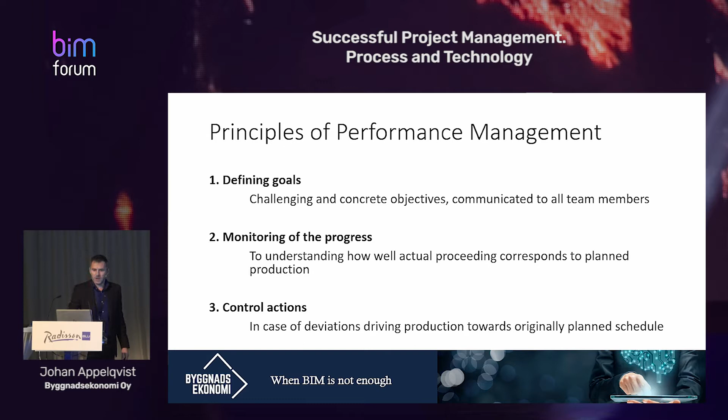And the third one is the control actions. When you have the goals and you track the proceeding and there is a deviation, what are the control actions that you do immediately that will bring back your project to the defined track heading for your goals?

So this means that the most important part of performance control is to ensure that you are proceeding as planned. Now, in order to do that, you need a high-quality plan as a basis that you can do the tracking on.

And then we go into BIM technology and the power of all the data that is available through BIM modeling. I'm going to show you shortly the process of BIM production management. Every tool I've run into so far follows almost or close to this process.

You start up with the actual modeling work, the design work where the design is created, and when you manage the process of how it is created, you end up with 3D models, you end up with BIM models. By setting requirements and managing the process, you end up with the model.

Now, when you have a model, you immediately have position and geometry. Every modeled object knows what kind of geometry it has. It has a physical position, as Kim and Jukka have shown. It has a position in the model, and it has a position also in the world.

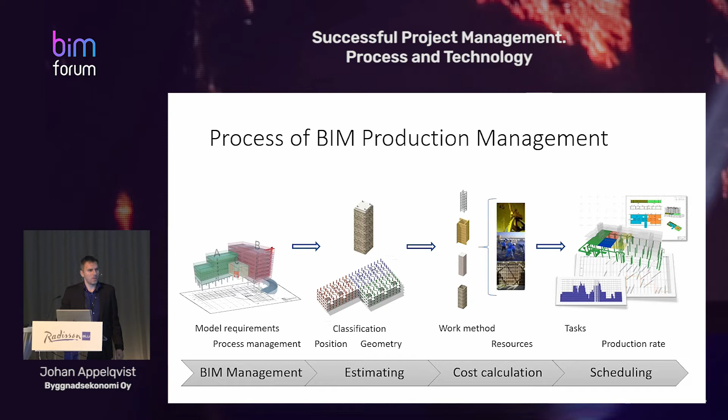Now, what do we actually need to do in order to succeed with that? There are two main things that has to be right. First of all, reliable geometry. We must trust the geometry. And in order to be able to trust the geometry, there are some things that we need to do.

We need to use the modeling tools correctly. Whether it is Revit, whether it is Tekla, or something else, we need to use the software the way it was intended to be used.

Well, the structural engineer thinks of a floor as the floor he's standing on, and the load-bearing structure below it. So we need to understand when we communicate with people that we communicate in the same way, on locations and on the geometry.

We need to agree on the modeling of connections, how do we handle it, what are the requirements for it. And we need to decide on the general level of detail, what are we supposed to find inside our model. I'll get to that a little bit later.

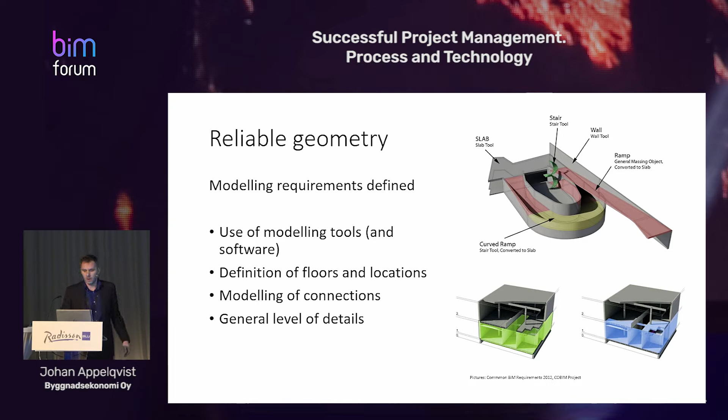When it comes to identification, actually finding information in the model, you need some kind of classification system. I learned yesterday there is no national standard for classification in construction in Lithuania. However, I'm not really concerned about that, because in Finland we have at least six of them. We have one for construction, one for MEP, one for electrical, one for infrastructure, one for structural engineering.

So which one should we use? It doesn't matter. You can pick any one, or any of them. You can use the Uniclass system, there are international alternatives. The most important thing is that there is a structure, and the structure is logical, it has full coverage, and it is used consistently throughout at least the one design area that you're working with. Because otherwise you will not be able to communicate with anyone else in your team, and they will not be able to find information in your model.

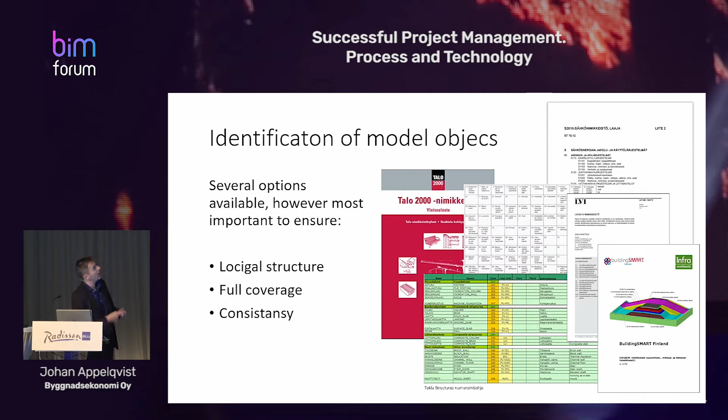But when you do have these two things in order - the geometry is there, it is reliable and right, and you have one identification system so you can actually find information, and it is built up so the full model follows the same structure - then you can pick any single object out of the model and read out of the geometry those quantities that you are interested in at that specific time.

The picture here wants to simulate that you can get the net surface area of a wall, the gross surface area of the wall, the length of the wall, the height of the wall, the width of the wall, the volume of the wall, as long as you can trust that the geometry is right and the identification tells you that this is wall type 1, you will be there.

Then you can bring the information into databases. And in the databases, you use recipes to bring those geometry quantities into material, work, and need for supply. Each of them can then be added with cost information, unit costs, how much it costs to build it, or with time information, how many hours it takes to build it.

I'm going to talk a little bit more about scheduling, but on the cost part, I know there are other people talking about cost later on.

Combining cost visually to objects is really, really effective. On the Stockholm Arena, a 240 million euro project in central Stockholm, built by Peab, we had estimators on site. My colleague worked for several years as an on-site estimator, providing cost data on, let's call it, a daily basis.

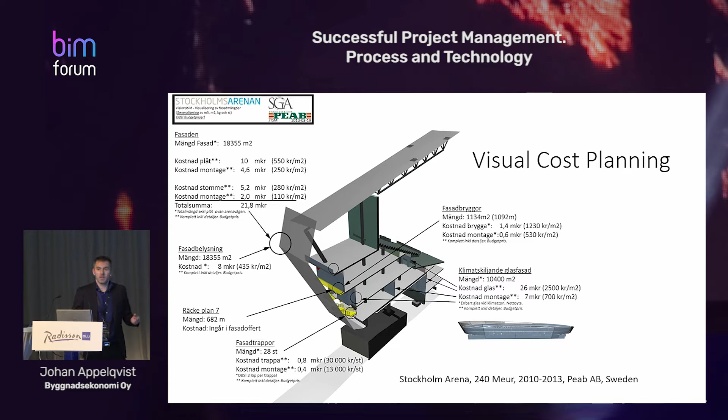So you can make your money visual. When you do it, you get everybody involved, everybody understands what you're talking about, and you get much more value compared to comparing just Excel spreadsheets.

Let's go into scheduling and optimization and try to figure out why 90% of every project is delayed, or why it shouldn't be delayed.

Scheduling methods. I mainly work with 3 scheduling methods. The first one is Gantt. These are the lines that are similar in every single industry. It shows activity as a function of time. It shows a line: when activity starts, it shows when activity stops.

The absolute best thing about this scheduling methodology is that it is an international standard. Everybody can read it. You don't need to be a construction expert in order to read it. And honestly, in early stage of the project, you are mainly discussing with people that are not construction experts. They might be economic experts. It's easy to read, it shows the activity, it shows the time where you're going, and you can see at a specific time what activities are supposed to be ongoing.

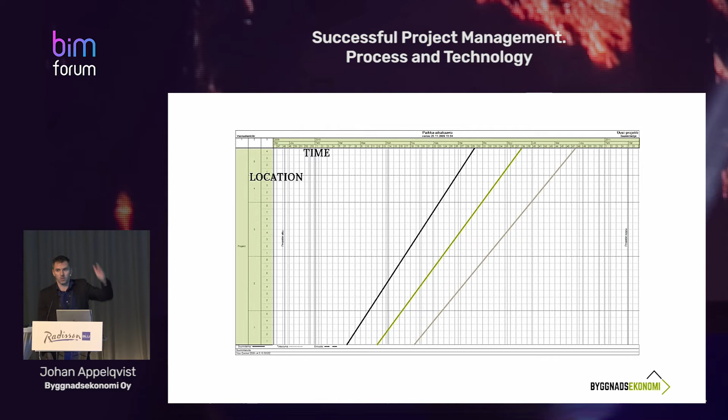Then you have the time, telling what day, month, week, or hour the work is being done. The actual activities are drawn as lines that go across this chart. You can see the starting point of the lines. Reading from above, you see what week it starts, what week it ends, and reading at any specific time you can see what activities are supposed to be ongoing.

You can also see where the crew is supposed to be. At this specific time, the black activity is supposed to be in the 3rd section's 6th work area. The green one is in the 2nd section, 6th area, and the last one, the gray one, is in the 1st section, 3rd work area.

You can read 3 other things from this. First, you can see where the crew is going next, so you see that when you're done with section 2, you move on to section 3 — the work order. Second, you can see what is inside one location, the activities that are going to happen there. If you look at one location vertically, you see first the black one, then the green one, then the gray one.

For example, first you build the walls, then you paint them, and after that you do the flooring - 3 activities coming after each other. The 3rd one shows us the area between activities. So the closer they are together, the more risk in the schedule, the further away they are, the more you can deviate from your plan without affecting other activities.

As a planning method, it brings you an overview, so it compresses the schedule. When it compresses the schedule, it means that you can show location at the same time as time. So when in Gantt you need to show 10 activities, the movement from 10 different locations, it is 1 activity in the line of balance.

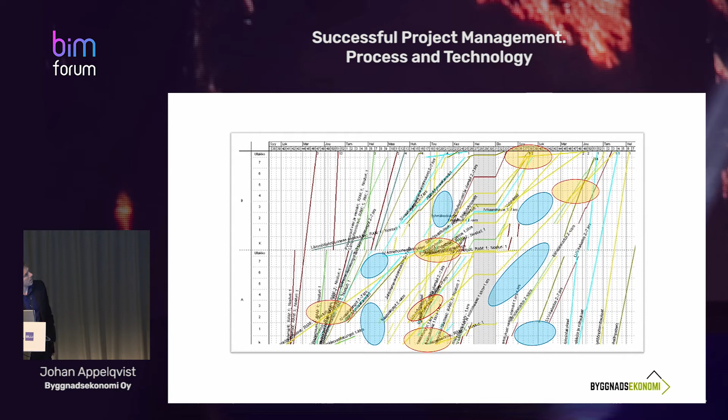And still, you see here, we have all these white spots. Now, what are the white spots? These are physical areas where no activity is going on for several days or weeks, because everybody wants to work at the same location at the same time a little bit earlier.

So if we go back to this one - it's not easy to plan like that. Projects don't look like that. You don't do all activities in every location. But what if you could?

Wouldn't it be nice if you could schedule so that every activity on the site would take 50 days? Every activity, always 50 days. It is possible. I mean, you're the manager of the project. You can decide that you use 1 person or 10 people. 1 person is slow, 10 people is fast.

So by deciding the crew, how many people are working, you can also decide on what they are working on. So are they doing just the carpet, or are they doing the carpet as well as the lining? Carpet and lining is slower, just the carpet is faster. You're the head of procurement, you can decide what you want. So you can actually affect what is the length of the activity.

Now, if every activity takes 50 days, which is smart, and you have a housing complex with this staircase, A, B, C, D, then on the first day of the project you open the door in the last floor of A and say, here you go, Mr. Contractor, go in, do your work, see you in 50 days. And 50 days later, he comes out from section D, last door, and says, here I am. Every 5 days you let someone in, and everyone works with the same tempo, 50 days. They never see each other, they never cause any harm to each other. Every time they complete the work, they clean up after them and move forward.

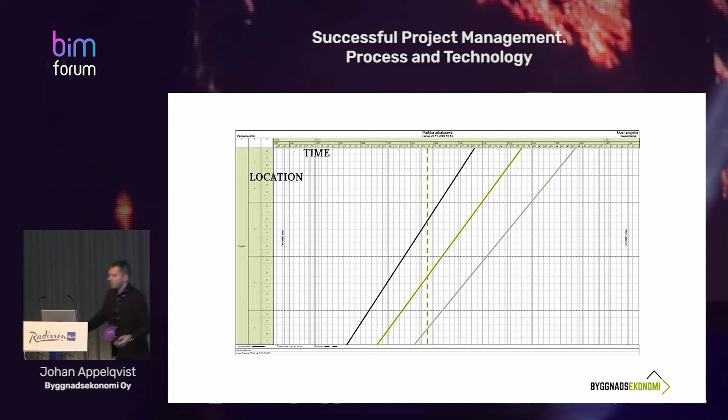It's quite easy to manage that project. Okay, so that's the theory. It's very complicated to do, but it's even more complicated if you approve a schedule like this one. So you need to understand what is in the schedule you are approving, and make sure that while you cannot create a perfect world, you can make a better world for everybody who is working.

And then we come into resource-based planning, and this is how I get back to the BIM model where I actually started some time ago. You have the model, you have the geometry, you have the identification that tells the object that can be brought into resources that can be added with time. And now you actually know that in this specific building, on the 3rd floor, in section A, I have 52 columns. My 52 columns require 520 square meters of formwork.

My 520 square meters of formwork, when it takes me 0.6 hours per square meter to build it, and I'm going to use 2 persons to do it, and they are going to work 8 hours a day, it will take me 19 shifts to get the work done. If I want to work faster, I need to add personnel, longer days, or change the work method so that I can work faster than 0.6 hours.

It's an open question. Every now and then people ask and think about, do I need to plan resources? Don't I just buy that service? I make a contract with the contractor or the subcontractor. I tell them, you have 50 days, I don't care how you do it.

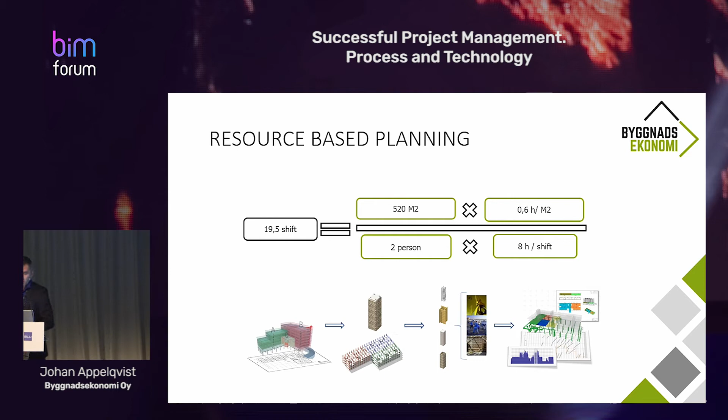Why should we? So let's take a look at some studies from Aalto University, a little bit older than the ones we saw earlier. This is from Olli Seppänen's PhD thesis, where he was tracking what happens on-site compared to what was the plan. Now that you all read my location-based schedules after the small training session, you can see that there are no collisions. We are using the time quite okay, spread out. But on the lower hand you see the resource graph, the amount of resources needed to do this specific electrical work that is planned. You see we start up early in the project with 1 electrician, we go to 2, 3, 4, 8, 10, 2, 1, 8, 12, 0.

What do you think happens when you go on to site? This is a real project. The electrician has signed for this schedule. He has said, yes, I'm going to build like this. What do they do? They do like this, they always do. Everybody does. They work with constant resources, because it is impossible to be economical and make a margin on your project unless you can work with even resources. So you see here, they start with 2, they go up to 3, 4, 5, and keep an even level throughout the project.

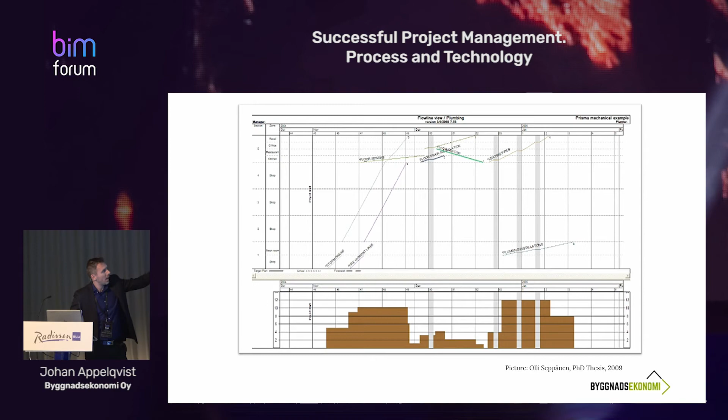And every time somebody shouts that you need to start up there, you need to have that done, it doesn't mean that more people magically come onto the site. It means that they will move to the guy that shouts the most, at least for a while. That's the outcome of the thesis made by Olli Seppänen. There are 4 different sites from 4 different main contractors, different projects, and they all show exactly the same: planned, signed, approved, and reality.

So if you think of it like this, it actually puts the 3D model in the center. And all the data you actually need in order to run it efficiently is the quantity per location. It is the key to it. It is the strength that makes it possible for you to manage the cost, the schedule, the resources, and even the site logistics.

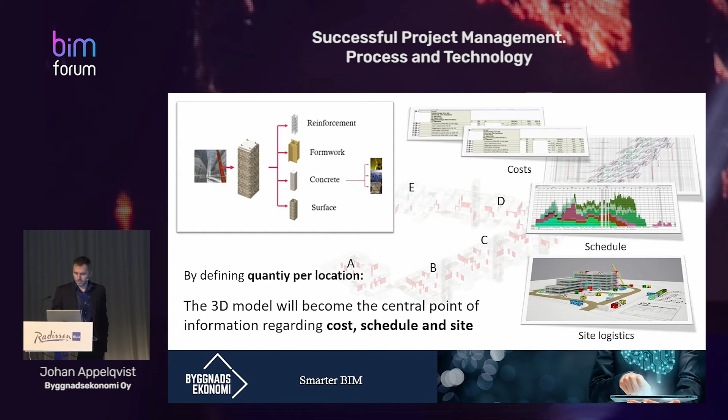Let's have a look at a couple of cases just to see if anyone can actually use this. This one is Kotikortteli, I worked on it a couple of years back. It's a housing project, looks like this, quite standard, a little bit larger. There are 7 buildings. In the middle of the building there is a concrete slab, you can park under it. There are some playgrounds on top of it that connect all the buildings together.

Problems with this one. First of all, 2 owners. The 4 buildings on the upper half of this one are owned by 1 owner, the lower one, a 2nd owner. These owners make decisions on finances on a different schedule. And in this specific project, it turned out that the building permit was missed by a couple of days, which means that we had to build a schedule so that some specific buildings were allowed to start and some specific buildings were not allowed to start.

We also built very close to the sea, and some parts went under the sea level, which means that those needed to be in the schedule first to make sure that we don't get water onto the site. But besides that, it's a totally empty site. Where should we start? As a scheduler, I measured the quantities per location. I made some 10 different alternatives to figure out which is the most effective way of building, taking into consideration these

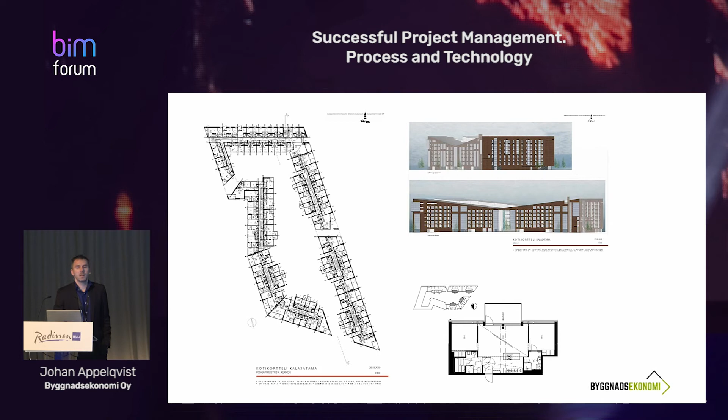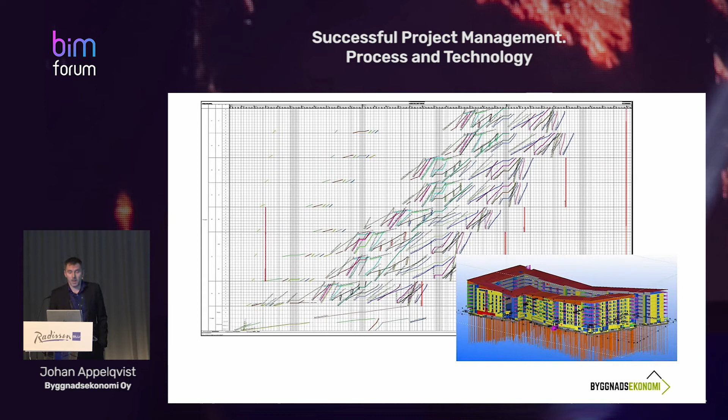restrictions of the project. And we came up with a quite nice schedule showing how we go from one building to another with a certain flow, and everybody would be happy. But then it was the groundworks and the piling. It was really, really complicated. So even for me and my colleagues, we just couldn't get the schedule to work.

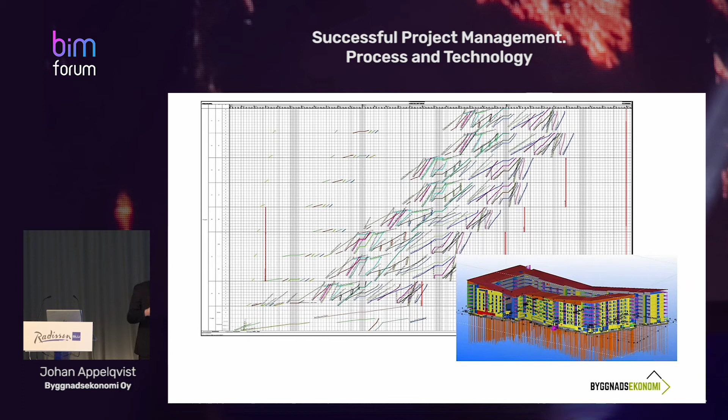None of the scheduling methodologies were good enough to show how the piling is going to be done, because there were several different types of piling, and the piling required that you come back to the same exact location several times. You cannot hit all the piles at the same time because the ground was not strong enough for that. So we had to switch over to 4D, and this is what we came up with, which is a quite basic 4D that actually shows how the piling crews are moving on the site in order to prepare for the most optimal way of building the buildings.

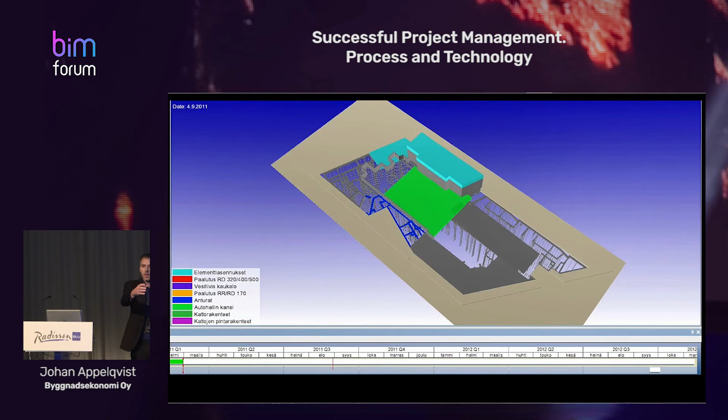You see there in the middle, the green slab is the part that is under sea level, that we had to start with, doing the foundations on the ground. You can see the piling crews moving around in different locations. But you can also see that when we come into the actual buildings, I switched over to work with Lego blocks. Just these blocks that show that, okay, now we start building this house. Because I thought it's not really interesting anymore. The real challenge was to solve the groundworks here.

So we made a movie, we made a contract based on that, we started to work, but also at one occasion I showed it to the design team, that this is how we're going to start. And to my great surprise, the structural engineer said, I love the movie. And I wonder why. Why would the structural engineer like this movie? Because he said he doesn't need a schedule anymore, because from this movie he can see the sequence of the building, and these sequences are going to tell him how he needs to provide the detailed design of the buildings, what month, what part will be under construction.

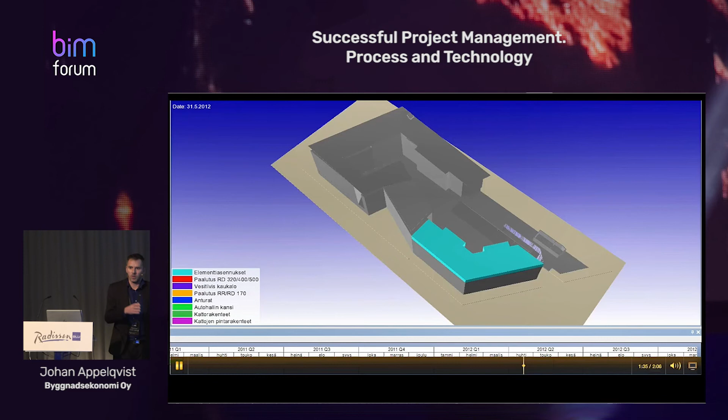And I thought, wow. Then it turned out that the sales loved this. How can sales love something that looks like this? Because a lot of people were concerned that buying into this house means it's going to be building on for several years. Am I buying a house on a construction site? Can I actually live here? Now, this one showed that actually you can, because we're going to sell the houses that are on the top there. We're going to sell them first.

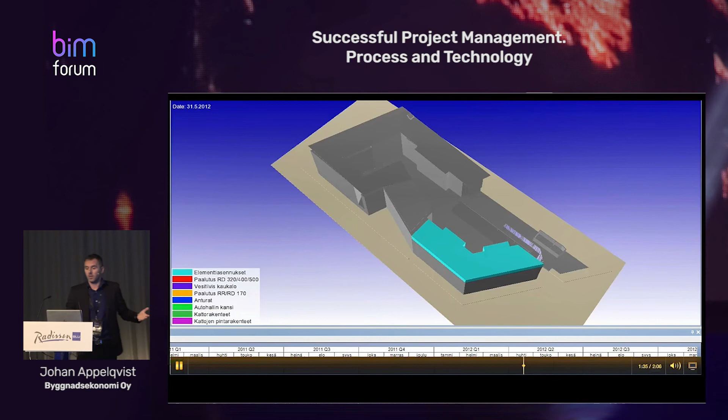You see, it's totally isolated. We keep the site away from where you live. There it's safe to come. It's safe to be. You can live on the site. So that brought to me the strength of communicating through visual models when it comes to designers, when it comes to getting everybody to understand the schedule.

Another case is Oodi, the central library in Helsinki. This project was built by YIT in 2015 to 2018.

It's a 17,000 square meter building. It opened up in December 2018. The most significant part of this one is the steel arc that you can see on the right side. I know Trimble has used this one in several other cases, but for other reasons.

Now, on this one, the problem was this, which was the erection of the framework made by the structural engineer, so the phasing. In order to build this one, these are the steps that you need to go through. The problem is that if you follow this one, you end up with a construction time that was longer than was agreed on. And because this central library was supposed to open up the evening before the Finnish National Day to celebrate, you couldn't change the ending date.

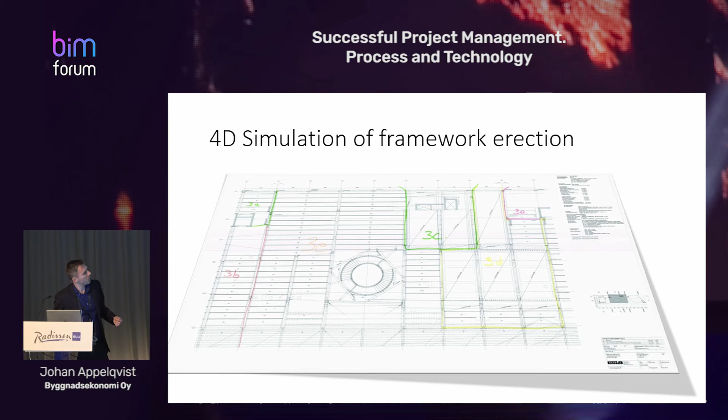And we tried the classic, divide into areas. We tried scheduling methods, and we still couldn't do it. Until we brought that specific thing that was on the drawings into a 3D model, showing the sequencing: this is what it looks like when we build according to your plans. And only then did the structural engineer understand that the stabilization solution made for this structure made it impossible to build in the given time frame.

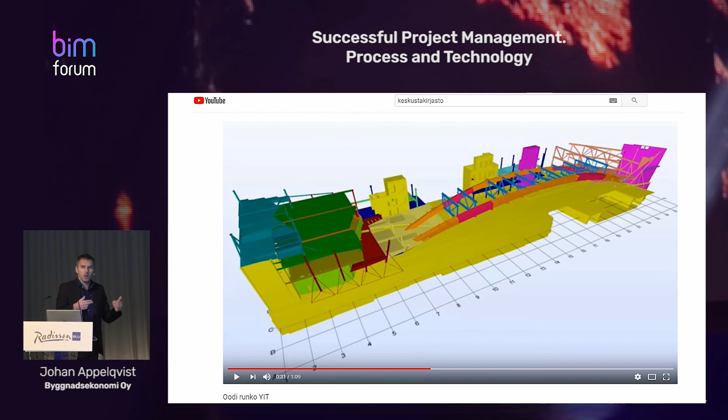What you see here is the solution, because the structural engineers changed the stabilization. When they changed the stabilization, it is possible to build all the parts that are on the left side while the arc part is still going on, which gave YIT a couple of thousand square meters of area where they could start the internal work several months earlier, which made it possible to actually deliver on time.

Now I connect time a lot of times when I talk. And that's a tricky part, because your model is constantly changing. You constantly get more and more information into it. And when you manage the model and when you manage the projects, you have to manage the information flow. When you start up in an early project, you have nothing but assumptions. Your model is based on sketches. You go forward until you can start talking about zones, you have spaces, and you can start building information based on that, until one day you actually have building parts in your model.

Now, what should that model process then be? And how do you know what information you need where? You actually need to talk with each other. So bring people together. Ask, who needs what when? This example: I need to schedule in detail the basement. Oh, that's in stage 4. Okay, then I need to do the drawings. And then I can update the costs. Very easy. As we go forward in the project, from stage to stage, we get more and more detailed information into the model. And every decision made affects the information that is in the model.

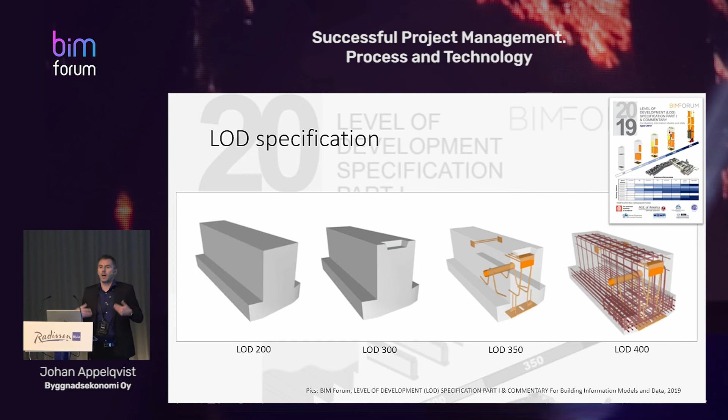The best way to manage this one is an international standard on level of development, where they have visually brought what is the level of detail, what should it look like, what do I have in the model in different phases. This is an American standard used widely around the world. There you bring it into a matrix. You have a classification system, you name all the parts that are going to be in your model, and you start telling that in this schematic design I need the foundation on level of detail 100, because on that basis I can make the decisions that are important to me.

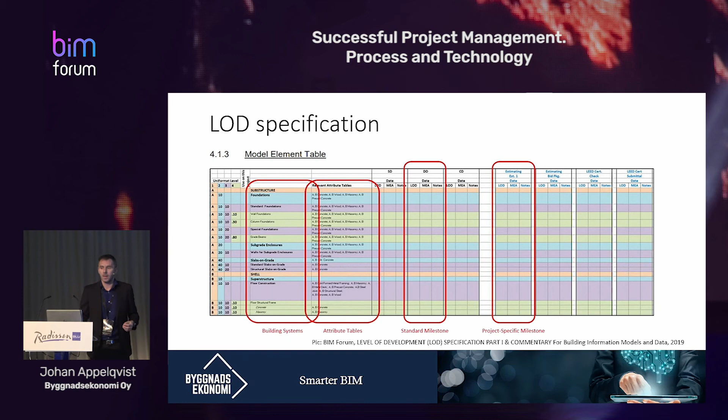And you do it for the design phases, but you also do it for the estimates. When do you need to do your estimate? What is the level of the estimate that you are going to do? What information do you need and at what level then? And you bring it all into the plan that you then use to drive your model. When you do so, you can have in the same model information that is on different levels of detail. And you will always know what assumptions can be made based on that specific object at this specific time. You have the identification, you have the data context, you have the geometry and the position, and you can use it to drive your cost, your site, your time, procurement, and logistics.

One example of using information over time and tracking it relates very, very well to Jukka's presentation on Trimble Connect. Because in this project, this is OP Vallila, it's managed by Haahtela Rakennuttaminen in 2010 to 2015. It's a 90,000 square meter building where we had the full responsibility of scheduling from day one in 2010 up until actually the last parts of the project were delivered.

In this one, we tracked the procurement chain from detailed design in structural of prefabricated elements, of what is the level of the design, when it is ready to ship over to the manufacturer, when the manufacturer receives the information, when they start producing the prefabricated element, when it's ready to ship to the site, when you actually have it on the site, and when it is installed. You already saw the technical demo of it. This is just a case of a project where we actually did it.

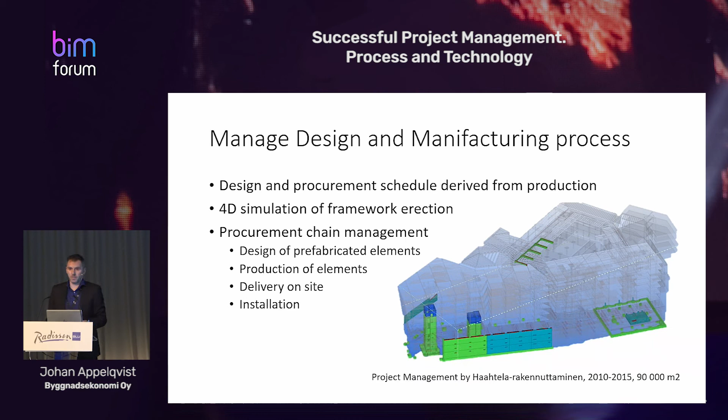You can see in the picture here, with different colors, what is installed now. The blue one is what's going to be installed next week. You can also track how far the design is going already. So you have total track of it. 90,000 square meters, prefabricated, not a single element was delivered at the wrong time. Real-time update. Okay, then next one.

Now when you have a lot of data, then it's a question of what data to use. Now I'm going to talk about just this little graph over here. The blue line in the graph shows the capacity of the prefabrication of the factory. The red one shows the amount of steel that needs to be installed according to the most optimal production schedule. And you can see that the production needs more steel than the factory can provide. Now what do you do then?

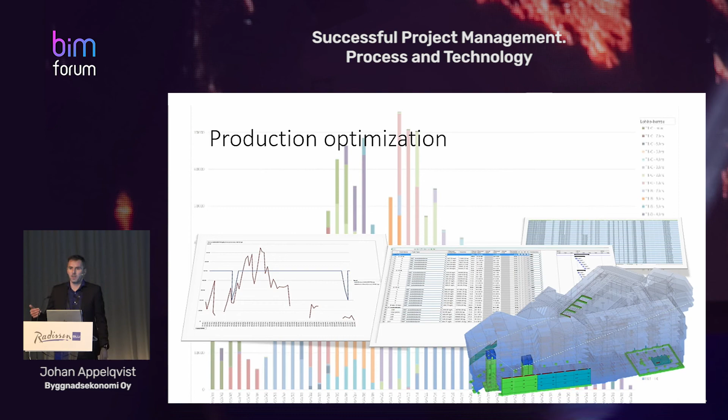Two alternatives. Either you need to proceed faster. You need to make the steel parts for storage. But if you decide to do that, it means that also your design needs to work earlier. And that was not a possibility. So based on the same information, based on the same data, this one was a procurement decision. All right, if we want to build that building, we need to have two providers of prefabricated elements. Otherwise, we cannot keep the optimal schedule.

Same project, same data. You have to make it simple. If you want people to actually take it and use it and make it out on the site, it has to be simple. And this is an example of how you make it simple. You see up on the right part, you see Delete, that is they were tearing down existing buildings. You can see the white one is Lemminkäinen. They are doing this foundation works.

You can see the green and yellow part that looks like just blocks, but they're not just blocks. This is the exact amount of how much rock excavation can be done during 1 week. And they are traced to the order of doing the rock excavation so that it will always provide the area needed for the next activities. Quite simple mathematics, really, really effective. And by blocking areas like this, EstCon, we are showing who is allowed to work on what area. Then in the middle, you have the highly detailed structural model, just as it is installed on site on the specific date when this one was used in the meeting.

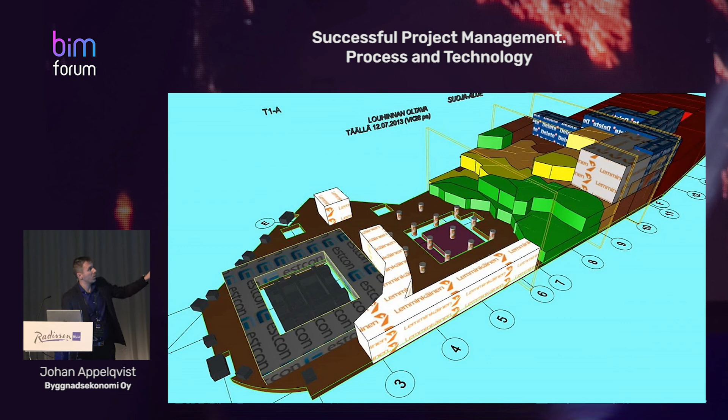So if you have to manage it, it has to be a process management solution when you go on. And you need to know why you're doing the BIM. There are thousands of reasons why you should do it. You can do it for better project management. You can do it for managing your customer decision process. You can do it for construction design. You can do it for managing the manufacturing parts, just like we did on the Vallila project. Or you can do it for maintenance uses.

But you have to know why. And you have to decide what you want to achieve. So your BIM goals have to be project specific. In this specific project, we are doing the 3D modeling and the BIM because we want to reach this. And when you have a goal, then you can track it, and then you can react in case of deviations. So it brings you to the point that you have to manage the process of BIM and the people around it.

You set the goals, you communicate the goal, everybody knows why you're doing it, how you're doing it, you agreed on the terms, you agreed on the cooperation plans, and you have the discussion of who needs what and when. And then I'm a big fan of all the lean principles of open communication in order to create conditions for everybody to succeed in the project.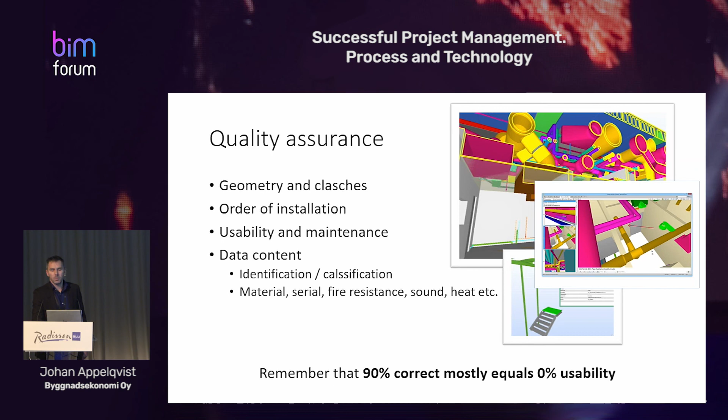You have to remember that if you're doing it almost correct, and you have 90% right, it's most probably 0% that's going to be used.

So how much can we save? This is the key question. Everybody asks it. In Sweden, the Swedes love this question. A couple of years back, every large construction company's manager stood up on a scene like this and said, 'We're going to save 10%.' Then the next one said 15%. And then a house builder stepped up and said 20%. I thought, wow, I'm going to buy your stocks, because if you cut 20% in a year, you're going to be the most value-bringing contractor in Europe, and I'm going to get my money back fast.

It's not easy. I can tell you that we did the Vallila project 10 million euros below budget and delivered on the exact same date as agreed. However, somebody would raise their hand and say, 'You must have over-budgeted.' Yeah, so much about that.

So let's turn it around. How much are you ready to lose? On that, we have examples. I picked Stockholm Arena again. This is a project where I was invited to come back several years after it was already built, because there were some disagreements on who spent how much money on what.

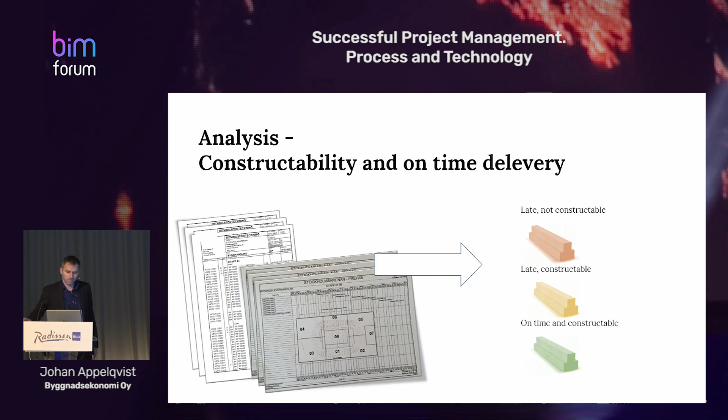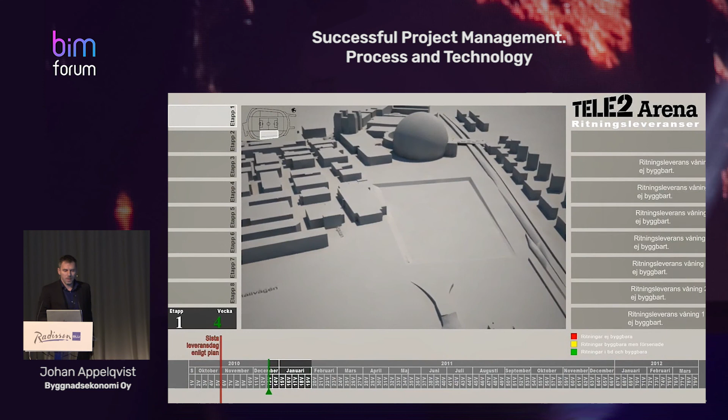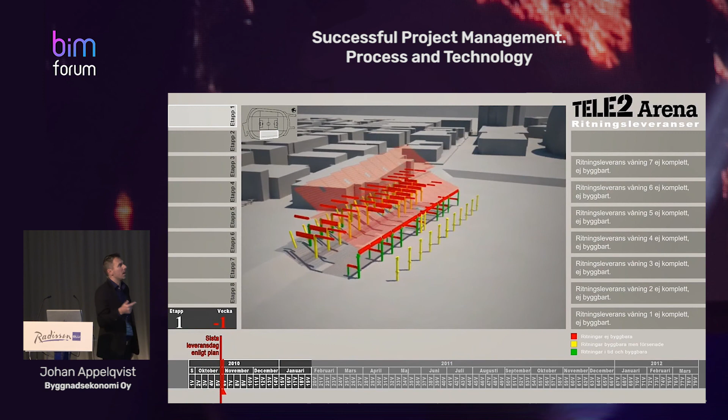It has a bit of a fancy start, but you see there's Sweden, and there is Stockholm, and here we come to the site, which is close to the Globe Arena, the ball-shaped old arena. The main part of the text is in Swedish, but you'll see we're visualizing by time what drawings are produced in this project—the drawings for the manufacturer to make the prefabricated elements. You can see we get the slabs, we get the beams, but it doesn't matter, because we don't have the columns and we don't have the foundations.

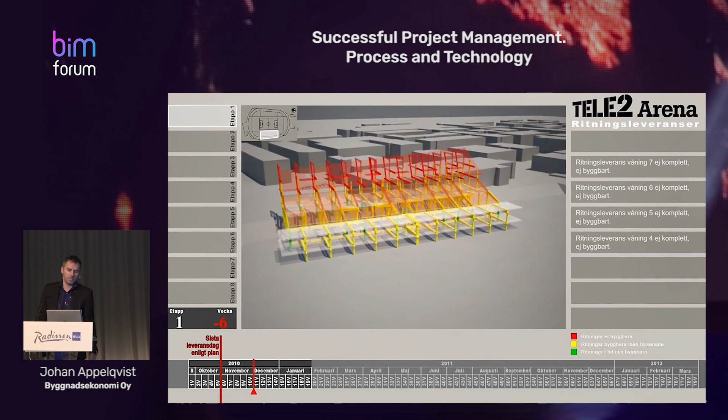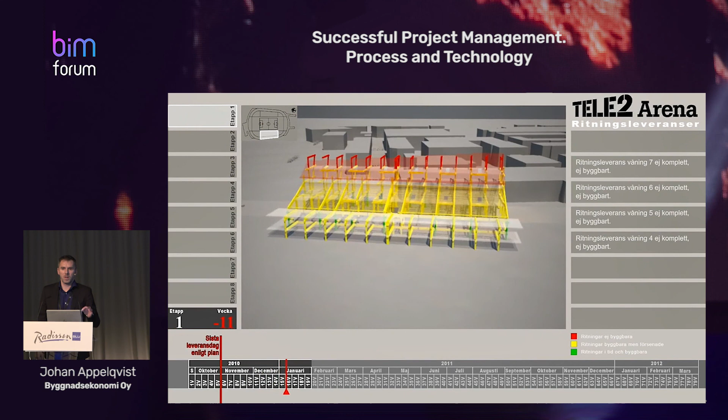You can see the timeline showing how many weeks we are late, and the overall wrong order of producing design information. In this first section, only 4.5% of the drawings were delivered on time from a constructability point of view. If you only look at how many drawings were made compared to whether they were on time or not, it didn't look too bad.

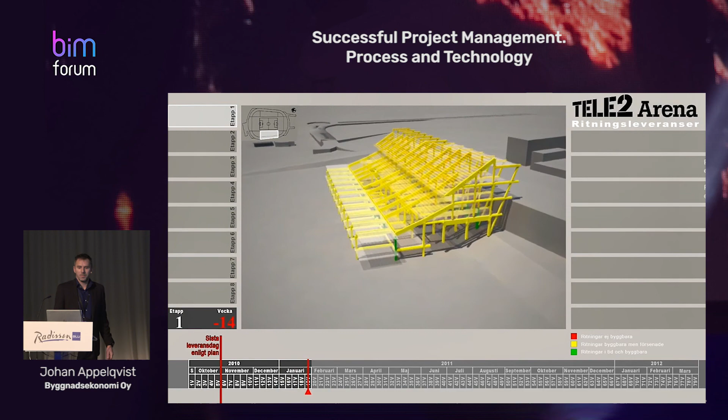So design is bankrupt after this question. Then we go over to the next one—it's a 6-minute movie, but it doesn't really change. You see again, in the next section, a lot more information is made, but not from the building point of view.

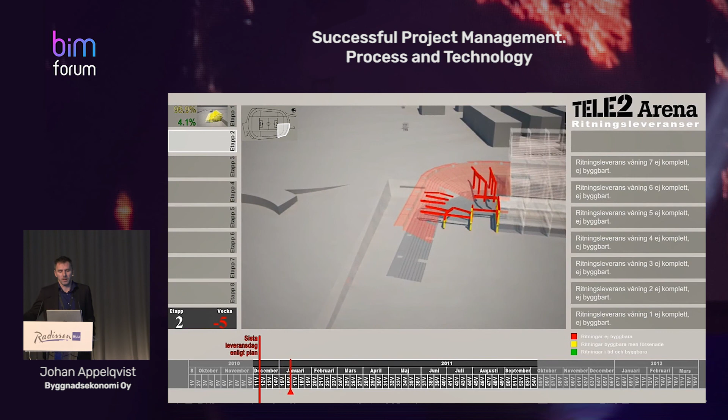So in conclusion, you need specific targets. In our projects, that means time and budget. Don't expect results unless you manage the process. Just the geometry and the clash detection—it's never enough if you want to succeed in the project. You have to manage the data. But when you do, there is absolutely no limit on what you can achieve with the technology. Thank you for listening.